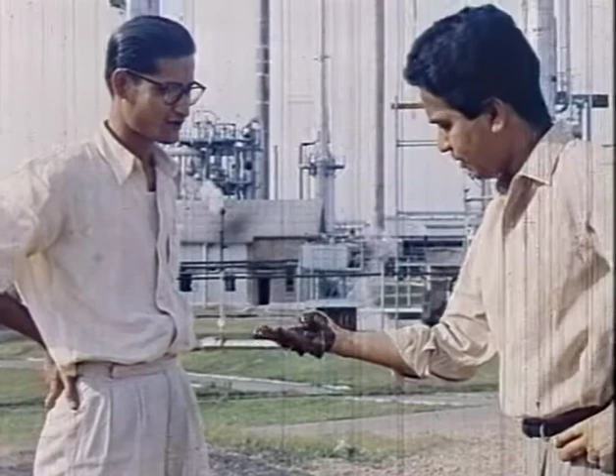This is oil. Thick, sticky crude oil. Black, dirty, and unrefined. It's got a long way to go before it becomes fuel and lubricants, candle wax and chemicals. It has, in fact, 700 miles to go, from the wells in Upper Assam to refineries in North India. Only a pipeline can make economic sense of such a journey.

So the sticky mess must somehow be persuaded to flow freely down 700 miles of pipe through little peasant holdings, which are the livelihood of small families, and great commercial tea gardens that are an important part of the economy. The wells and the refineries are both within the huge subcontinental state of India. And whilst agriculture is important, oil fuel supplies that do not have to be imported are precious beyond price in a land that's straining every fibre to become a self-supporting, modern industrial state.

The usual way of starting a big engineering project is to advertise the job in the press and let people who understand the work tender for it. In this case, the paper was the London Times, a copy of which was delivered as usual at the offices of W.H. Allen, Sons and Company of Bedford in England, who understand diesel and electric power very thoroughly indeed.

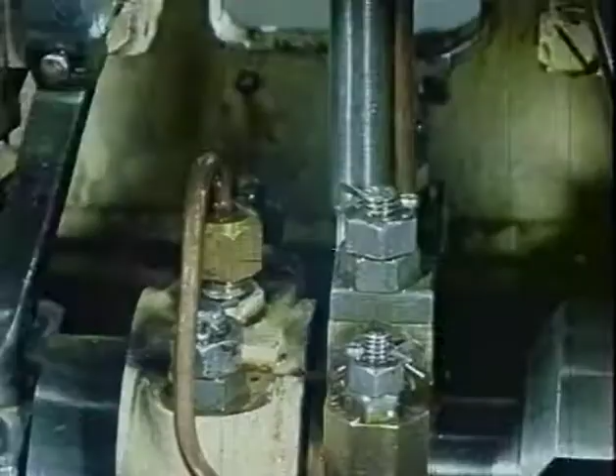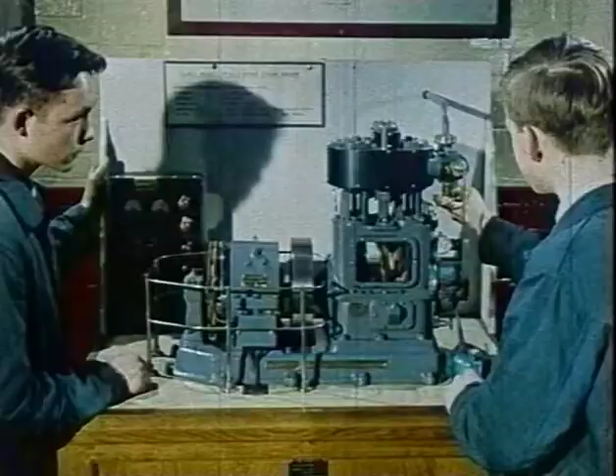This scale-working model of an engine was made by the apprentices at W.H. Allen's in their own training school. For any firm which intends to keep abreast of the fierce technical competition in modern industry cannot rely on chance for its supply of trained and expert personnel.

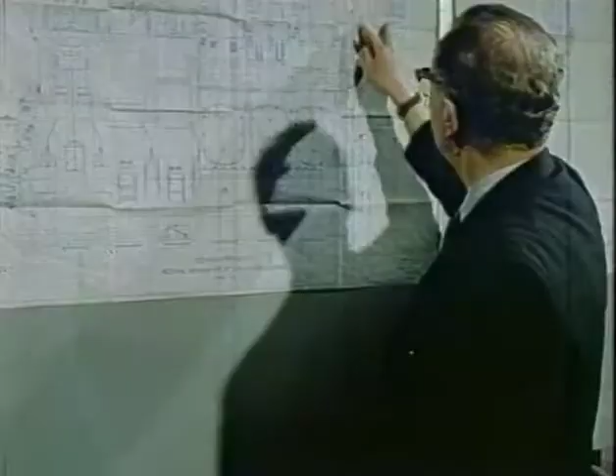And these boys may become the heads of departments who, not so many years ahead, may be making the same sort of decisions for the firm that are now being discussed by the chief designer and the manager of the diesel department. Once the specifications have arrived, the various design teams have to assess the difficulties, decide whether tried and conventional equipment will do the job, or whether special modifications or even entirely new designs may be called for.

In the case of the diesel engines to power the pumps and electric generators along the North India pipeline, the biggest problem was fuel, for only the crude in the pipeline or natural gas from the wells was readily available, and the specification called for an engine which could use either at the turn of a switch. This was nothing very new in engineering, but the crude from the Naharkatiya wells was a problem, as its high wax content makes it physically intractable and its low flash point requires respectful handling.

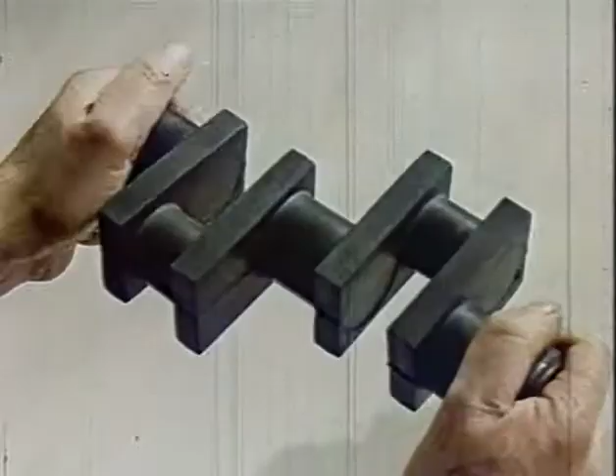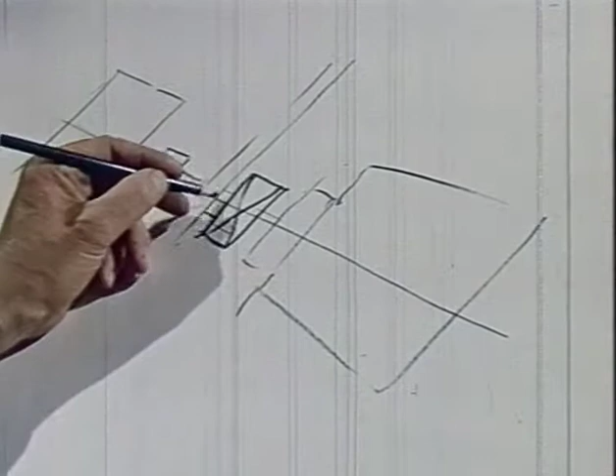Probably at no point in design more than now during the pre-tender work does that indispensable but unassessable quality of specialist experience play a greater part, because it's at this stage the fundamental assumptions must be made and decisions taken which will have to be turned into successful engineering and viable economics when the contract is placed. That's why every tender has the full attention of the best brains from the word go, and why there's no room at all for bluff, which would be called without remorse by the very forces of nature which it is the engineer's job to harness.

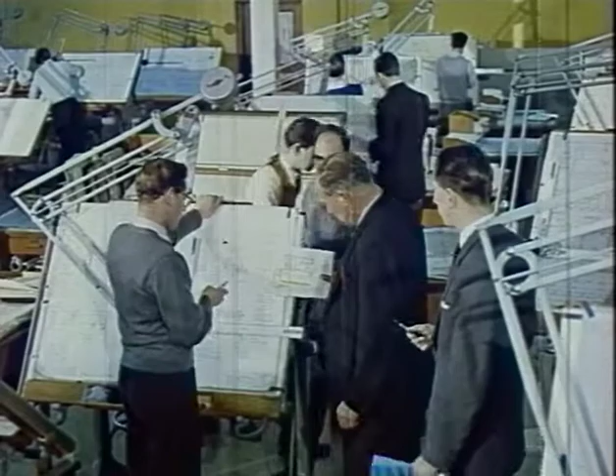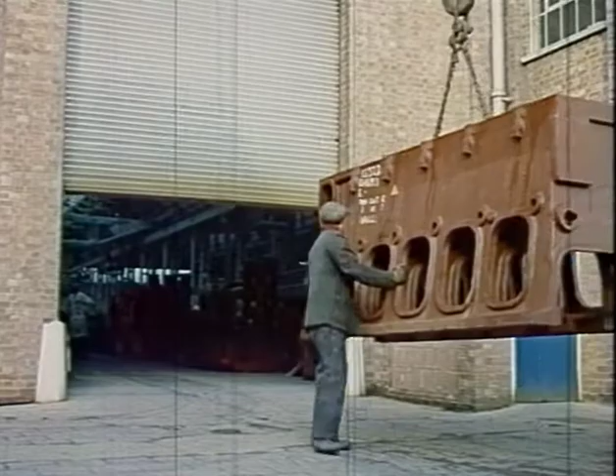The same quality of concentration on the work of tendering is applied to every inquiry, despite the fact that only a proportion result in orders. In this case, the particular solution of the engineering problems involved enabled an order to be obtained in the face of world competition. The arrival of heavy hardware from subcontractors is the visible evidence of the beginning of production, adding, as it were, a new ground bass to the everyday racket of the machine shops.

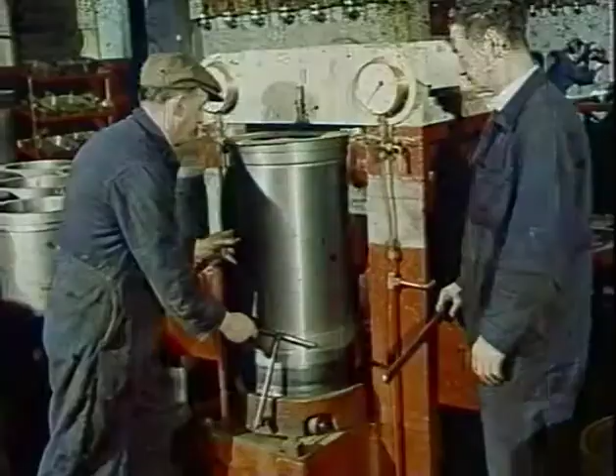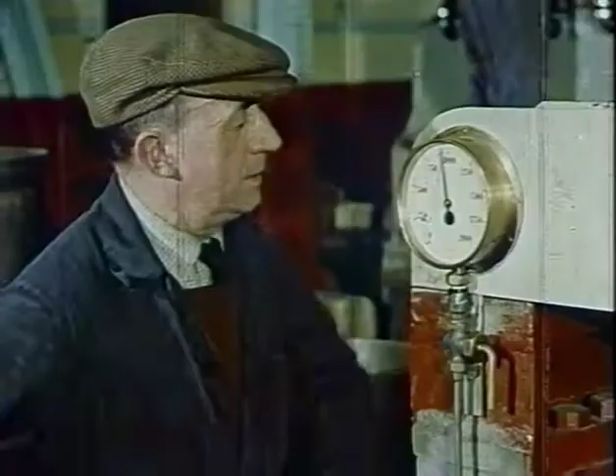From an early stage of manufacture, testing is constantly carried out. Here, a cylinder liner is being tested well in excess of its normal working pressure. And here a technician is satisfying himself as to the parallelism and diameter of a crankshaft.

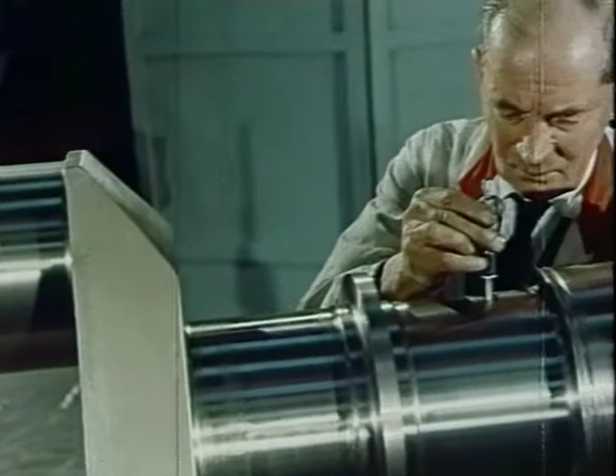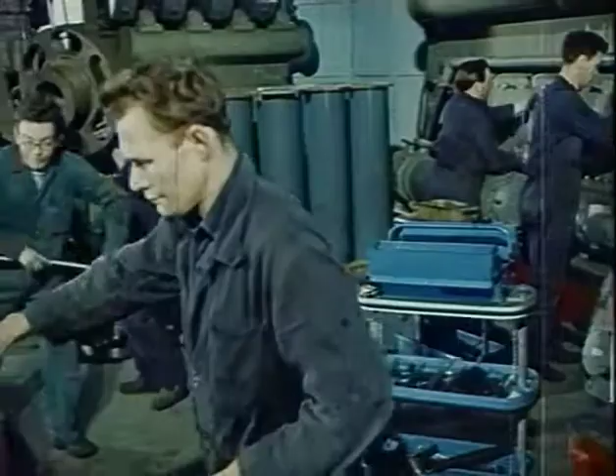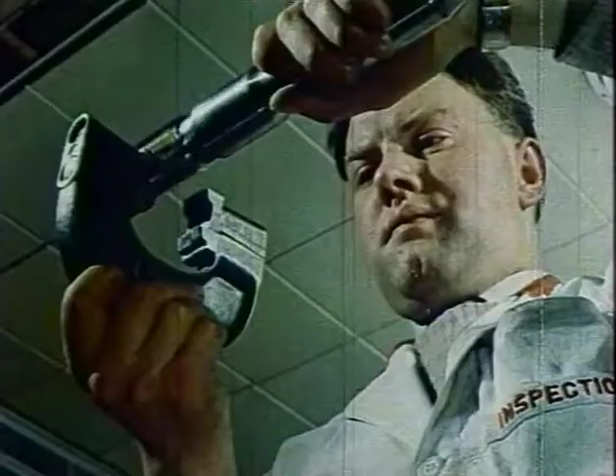Inspection and checking generally fall into two classes: control of manufacturing quality and accuracy, and the inspection of parts and indeed whole machines after test running under actual working conditions. To do this, the whole unit must be assembled and run, and before proceeding to this, it would be as well to take a look at the system of supplying fuel to one of the engines, remembering that this fuel is thick, crude oil.

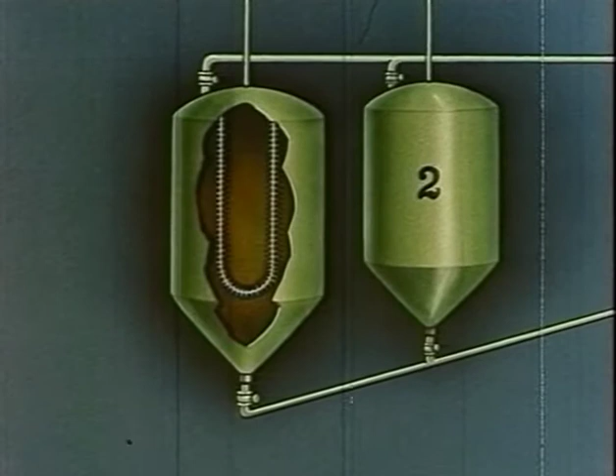First of all, we have two conical bottom tanks, each holding 1 day's supply of oil and fitted with tubular hot water heaters to improve the viscosity of the oil by raising its temperature to about 100 degrees Fahrenheit. In order further to purify the now warm and therefore more tractable but still very dirty fuel, the sludge is allowed to collect in the conical bottom and drained away.

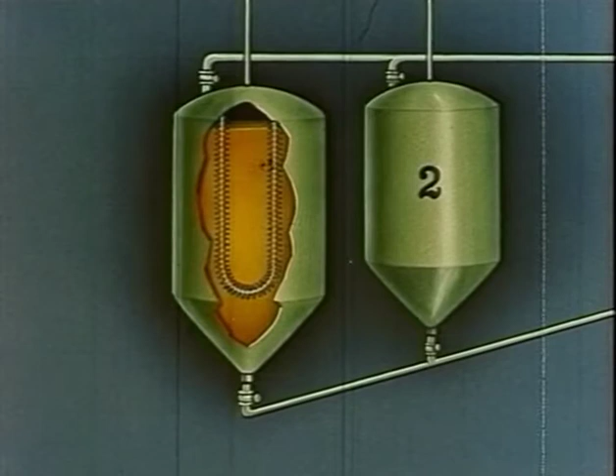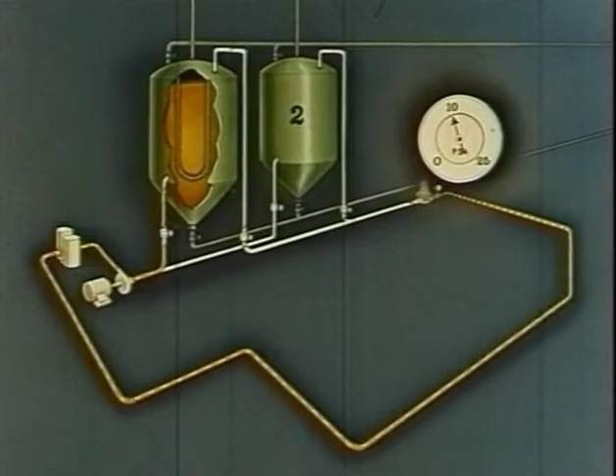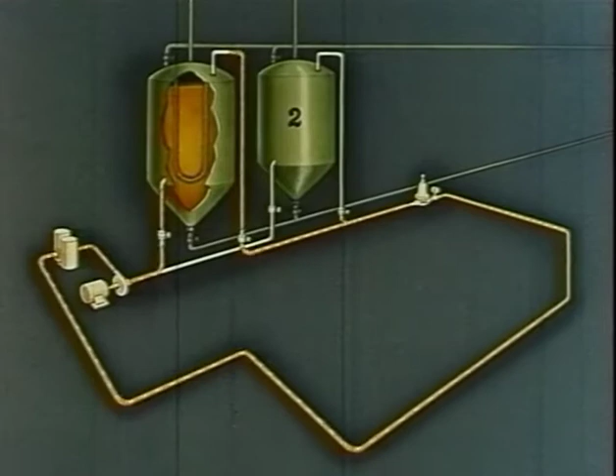The settled fuel is drawn from the tank in use by a circulating pump in a ring main system round each pumping station. It's passed through the main filter, then circulated in the ring main. Pressure in the system is controlled by a regulating valve at a normal working level of 20 pounds per square inch. The cycle is continuous, in that surplus oil is returned to the tank, then recirculated in the ring main, which is insulated to reduce heat losses.

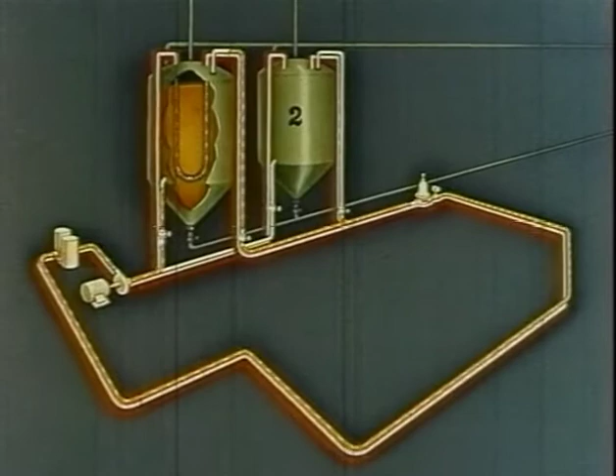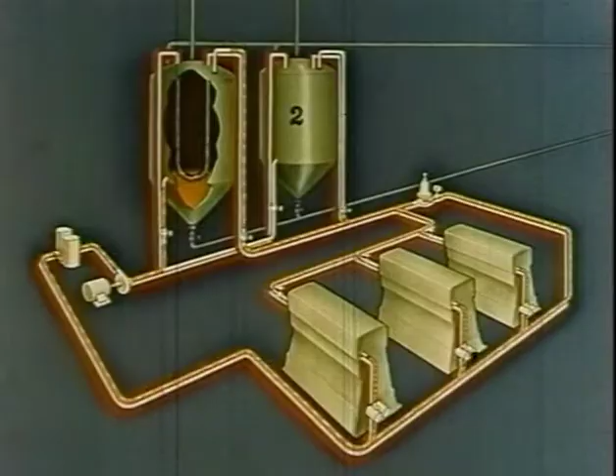When the engines are running, oil is constantly being drawn from the ring main system by the fuel injection pump at a rate less than that at which the oil is circulating, thus ensuring that a reasonable flow is always maintained in the system. That was a simplified picture of the fuel ring main. But in fact, it looks rather less neat and tidy when seen, as it is here, applied to a typical works research unit.

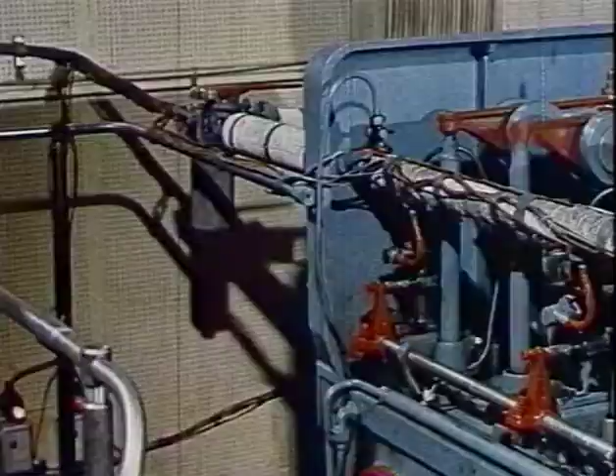This engine is first run on ordinary diesel fuel, and its performance is recorded. The pipework running along the top of the engine is in fact the ring main, which will shortly be carrying not clean diesel fuel, but this specially imported sample of crude oil from the wells at Nahorkatiya.

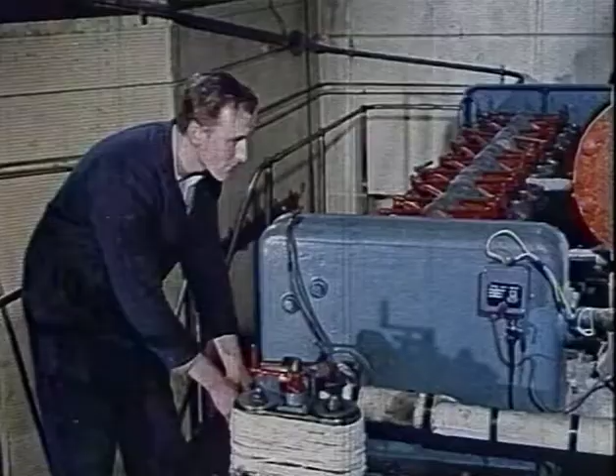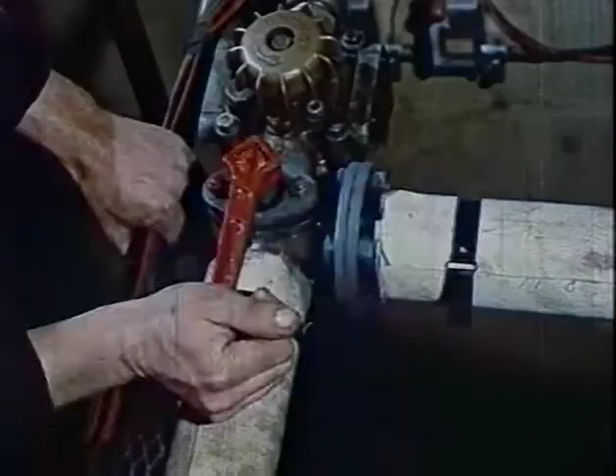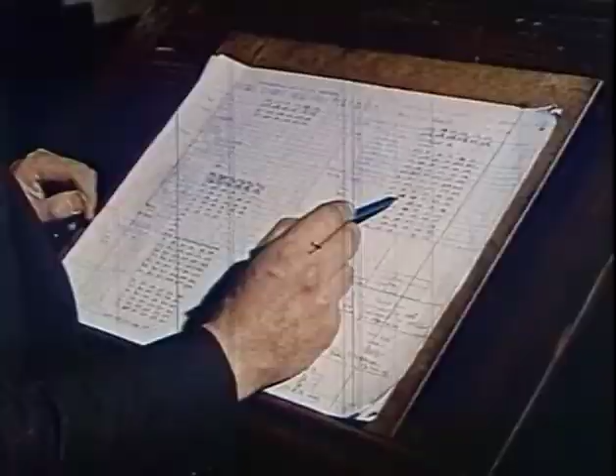For the test with crude oil fueling, the engine is started on diesel oil. This time, no prolonged test is made with the conventional fuel, and after a minute or so, a lever is moved, and the ring main starts to feed Nahorkatiya crude to the engine. Now the engine will run under load for 500 hours, and frequent readings will be taken at the engine and at the generator which it's driving until the great mass of data required has been accumulated.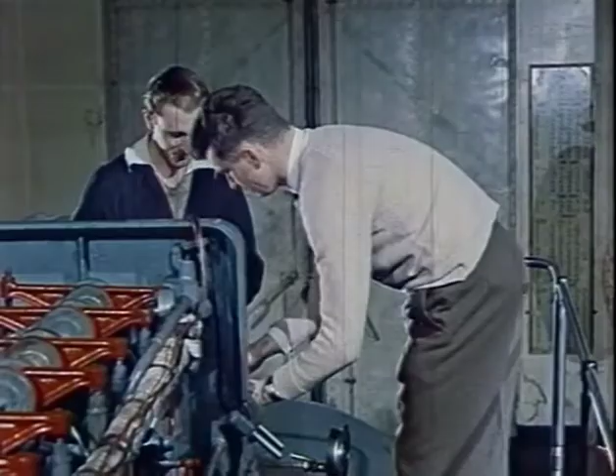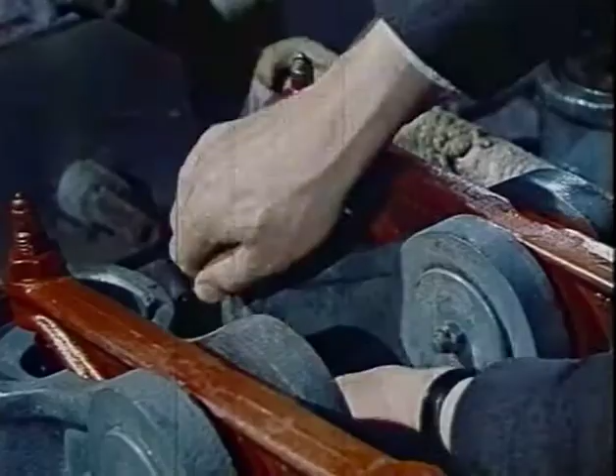The first performance figures are important to all concerned. It's also important to know just what is going to be left in those ring main filters after 500 hours of running a really big diesel like this on what is, after all, a purely fortuitous mixture of highly volatile petroleum products, something uncommonly like candle grease, and a lavish dash of good old Mother Earth, sand and all.

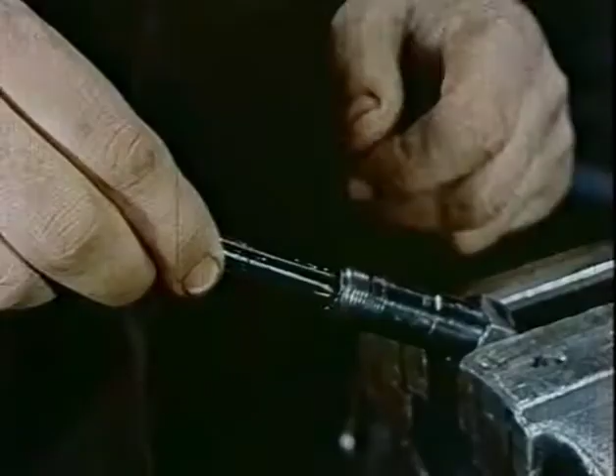This is where the filters, which later on will have the highly important job of keeping the worst of the foreign bodies out of the engine, do an extra job of showing just exactly what they can trap, and therefore, by implication, what is likely to be offered to the engine as fuel. Dirty enough stuff it looks to the naked eye. But under the microscope, it's hard to believe that any engine would accept it as fuel.

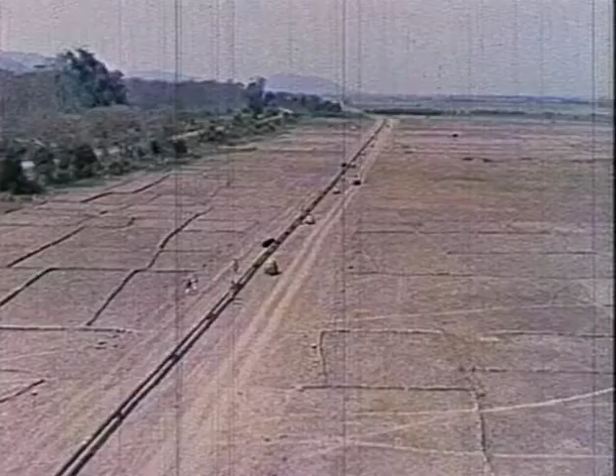That's the sort of fuel the engines will have to use to move 700 miles of waxy, sulky crude. But what sort of engines will they be? Well, first of all, the fuel situation along the pipeline dictates the basic engine design. At Nahorkatiya, the enormous supply of natural gas, some of which hitherto had been flared off, was to be used as fuel, in conjunction with a small percentage of the crude oil from the same important local wells.

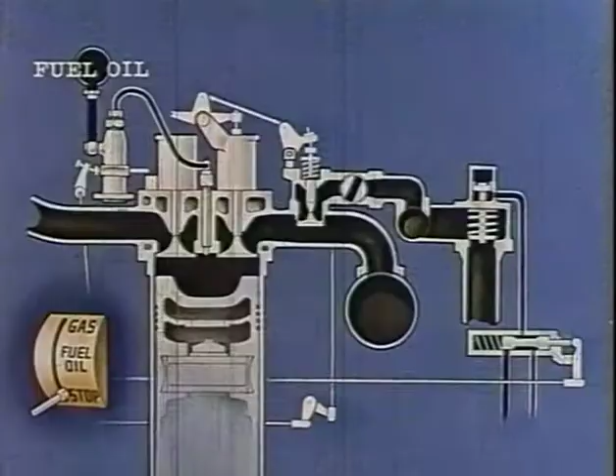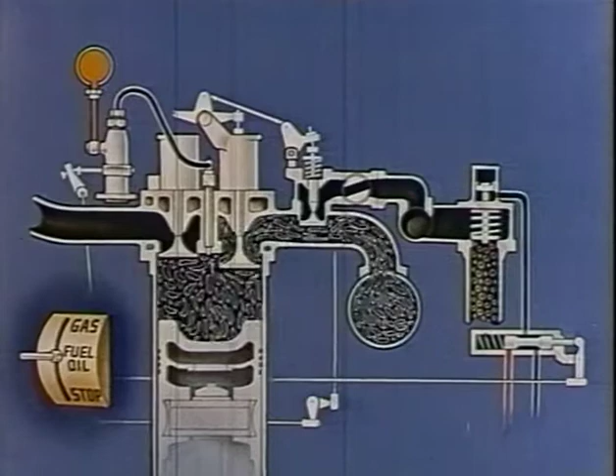Where gas was available, the answer was a dual-fuel engine, one which can run on liquid or gaseous fuel, the gas being ignited by a small amount of liquid fuel. The engine is started, and to begin with, runs on liquid from the pipeline, like every four-stroke diesel. But once it's running on oil, it can be switched over by manual control to run on gas. This changeover does not interrupt the output of power.

When running on gas, the consumption of oil is reduced by over 90%, and in the event of a failure in the gas supply, the engine reverts automatically to oil, at the same time closing the main gas valve, which eliminates any possible danger when gas pressure is restored.

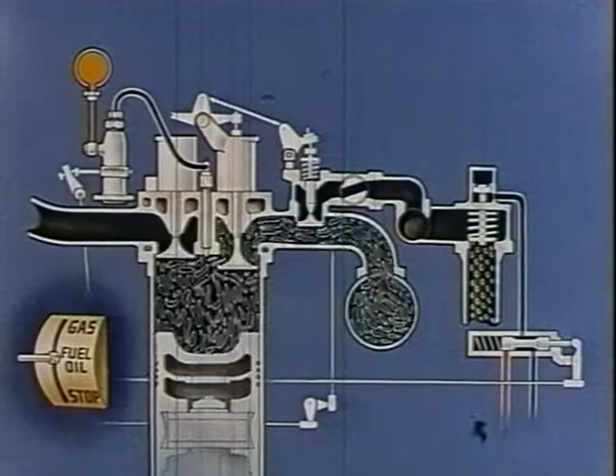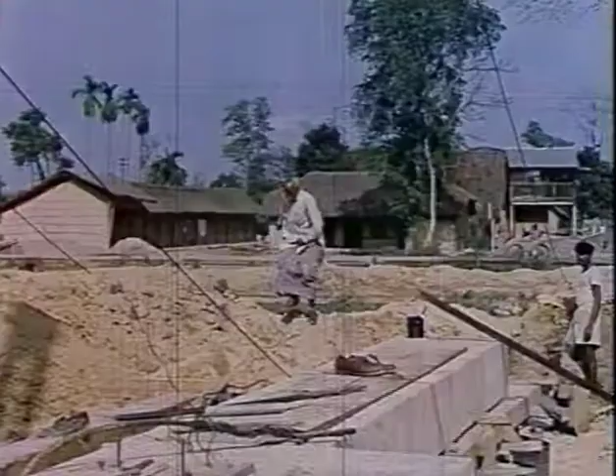By now, the contractors out in India are beginning to show results in the work of erecting the pumping stations along the pipeline. For the first time, it's possible to get a more than purely theoretical idea of where everything is going to be put and how it's all going to fit together. For the first time, too, even the most determinedly professional engineer cannot help but catch a whiff of the heady air of creation that is about.

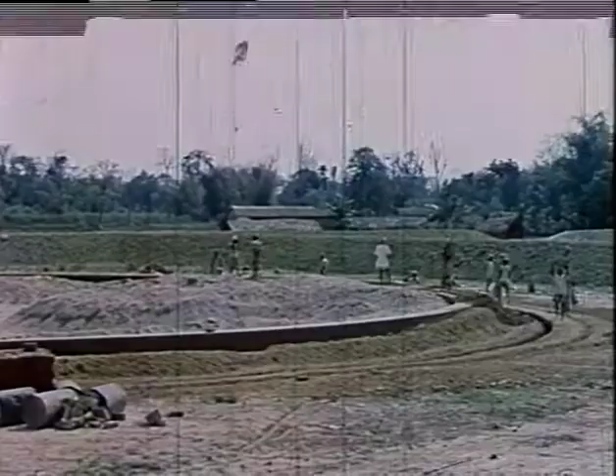For this is going to be more than a big subcontract to a huge undertaking. It's taking part in the explosive emergence of what is a continent in all but name, as a partner in the wonders and responsibilities of the second half of the 20th century. For the pipeline and its pumping stations will be run by Indian engineers, graduates possibly of this very institution in the state from which the crude oil comes.

India, like every other state at a critical stage in industrialization, is training her technical students wherever the best in knowledge and technique is available, including the W.H. Allen Works at Bedford, where this group is studying work in the electrical shops where the self-regulating alternators for the North India Pipeline's power supply are being made.

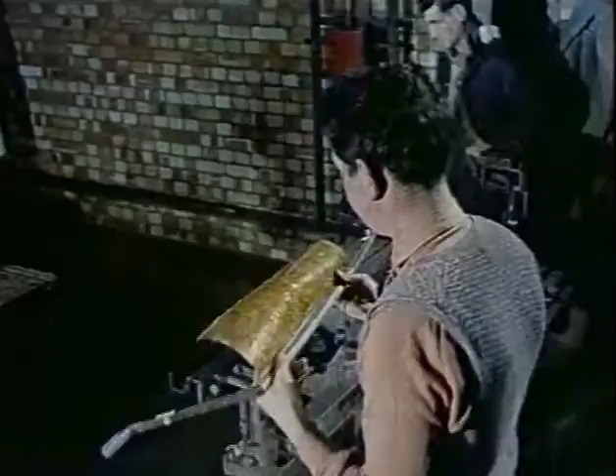No young engineer can get far without a good theoretical training, but nevertheless, first-hand experience of the problems and the skills of the actual builders of modern machinery can do something beyond the power of any textbook.

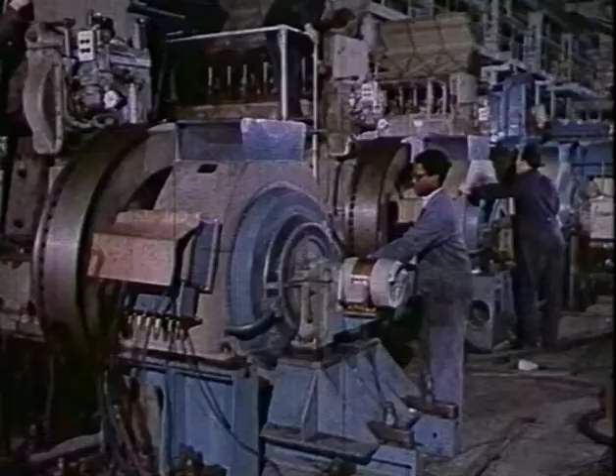The complex organization of manufacture and testing moves forward all the time, each item being fitted to its appropriate neighbor in the scheme and the scale of operations growing all the time until it culminates in the products of the electrical and the diesel departments being coupled together to run the most important test of all, a pair of newly built engines driving two of the actual alternators under load.

This is a test to prove the performance of complete units, but to the layman, it has more than a little of the panache of the concert platform.

This full-scale test is in fact the last of any kind that the equipment will undergo before it is started up on its permanent site in India. For this reason, if for no other, it is attended not only by the members of W.H. Allen's team of specialists, but by the engineering representative of the customer.

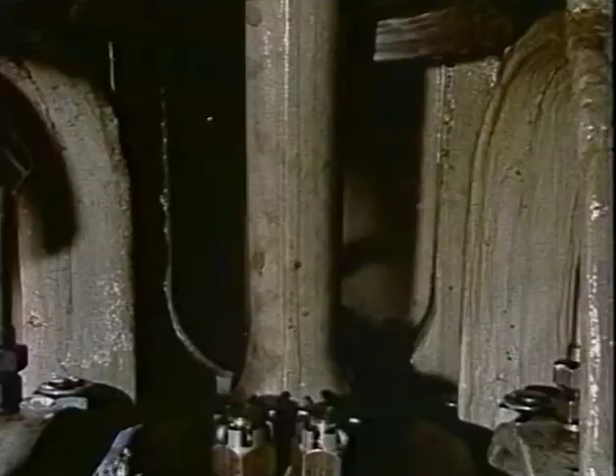No sooner is the engine shut down than a complete dismantling begins. Everything is stripped down to its component parts and a minute examination is made to discover whether any part has in any way deviated from its expected performance, calculated not only on design theory, but from the earlier practical tests.

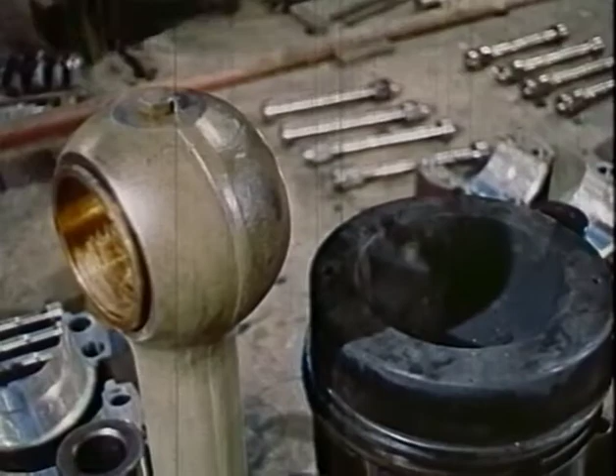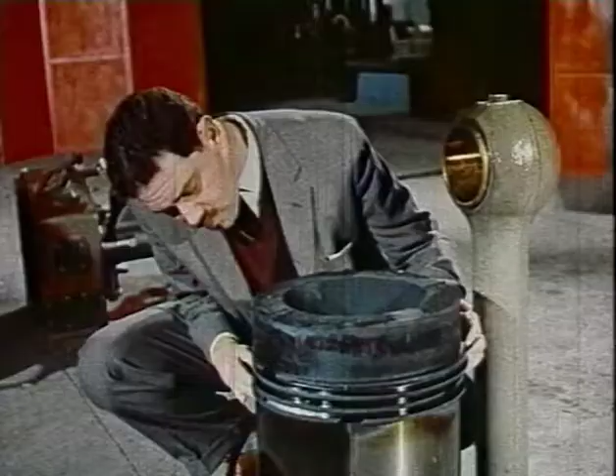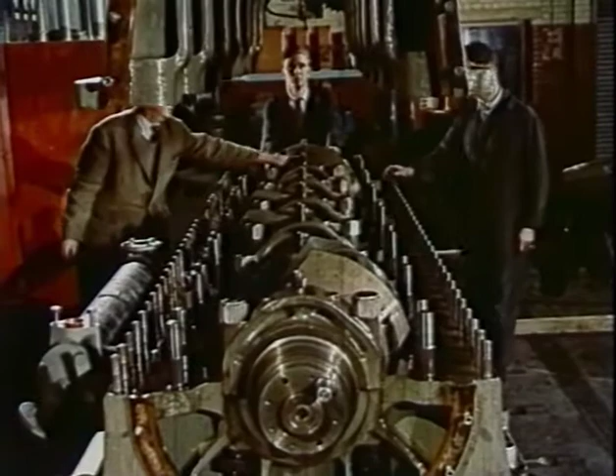Here again, the customer's engineer is very much in evidence and becomes a part of the manufacturer's team in their common search for any sign of abnormal wear. For this is common ground, and maker and customer share a common aim, the best that engineering skill can produce.

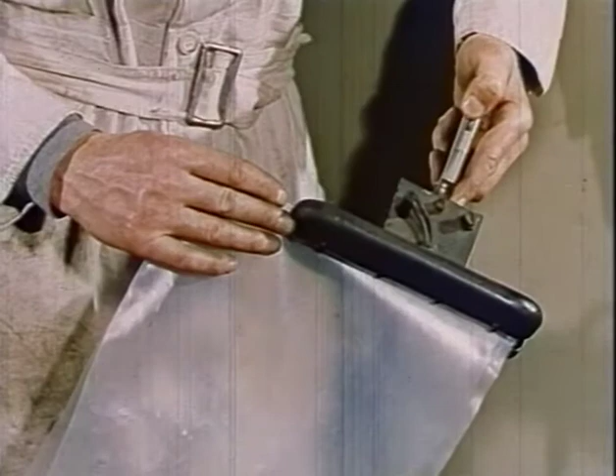As each section is inspected and passed for export, it has to be prepared to withstand the various hazards of the journey. Of these, heat and damp are not the least, and it's necessary to enclose many of the more delicate parts in airtight polythene bags, carefully sealed, and from which the air is then mechanically exhausted.

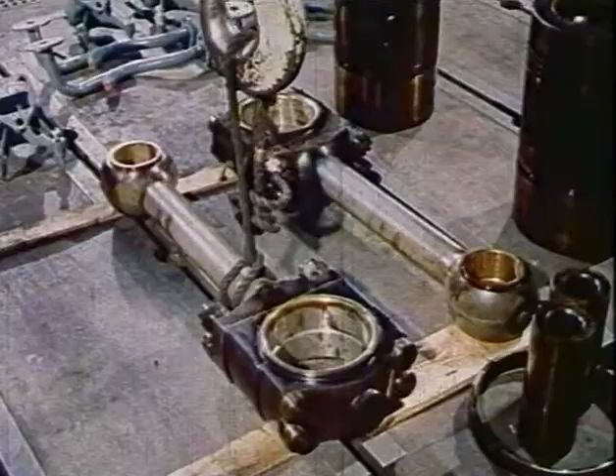This method provides very effective protection from extremes of climate. And of course, the relatively delicate polythene is further protected by waterproofed heavy crates from the more violent hazards of long-distance travel.

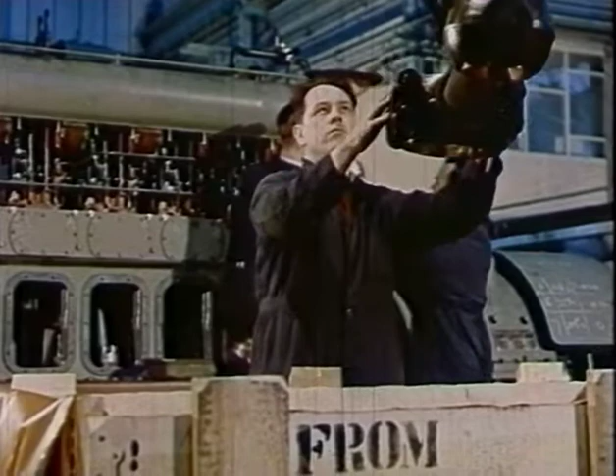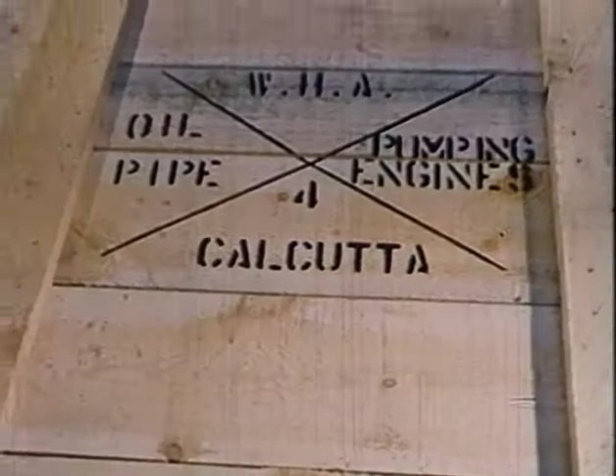Once again, minute care characterizes even the apparently less enthralling processes of packing, and rightly so. For these crates contain the work of many men and many months, and they have a long, hard journey ahead of them.

Eventually, the whole plant, mechanical and electrical, stands crated and anonymous at the assembly point in India. This is perhaps the moment to reflect on how all this machinery is going to work and who is going to work it. The most important part in the whole scheme of control lies in the second part of the question, for this will be the most advanced pipeline in the world, and the pumping stations will be remotely controlled.

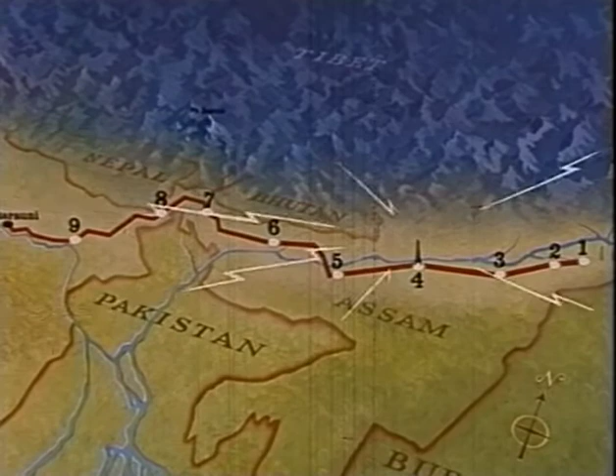This represents an enormous advance over earlier control systems, and months of cooperation between the engine designers at W.H. Allen and the communication engineers were needed. The flow in the buried pipeline will be controlled by a dispatcher who can operate any of the stations by means of an extremely sophisticated control system incorporating a VHF radio network. Most of the control is directly electrical, and for the first time in pipeline history avoids cumbersome pneumatic devices.

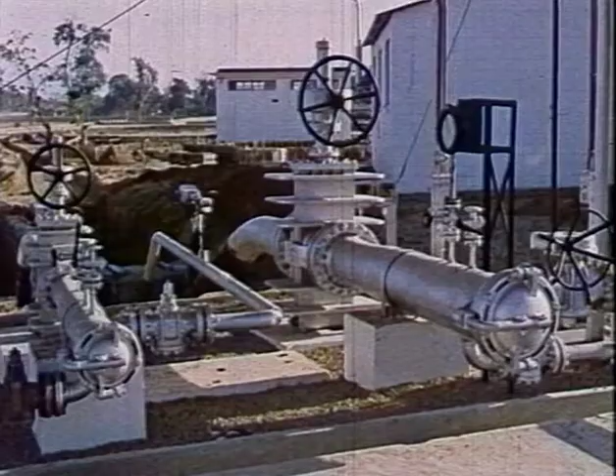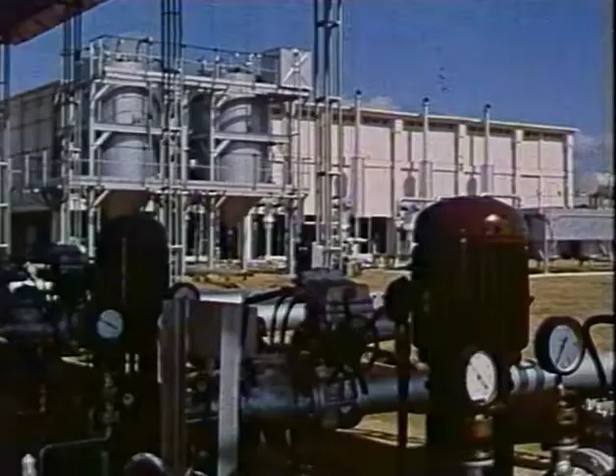There she is, a little smarter in her new paint than the last time we saw her, coupled up to the huge ram pump and ready to go. Once the ring main section looked obscure and grubby in the test bay. Now everything looks almost unnaturally clean and bright in the hot sunshine. You would hardly recognize our old friends, the conical bottom fuel tanks, in these gleaming monsters in the background, but that's what they are.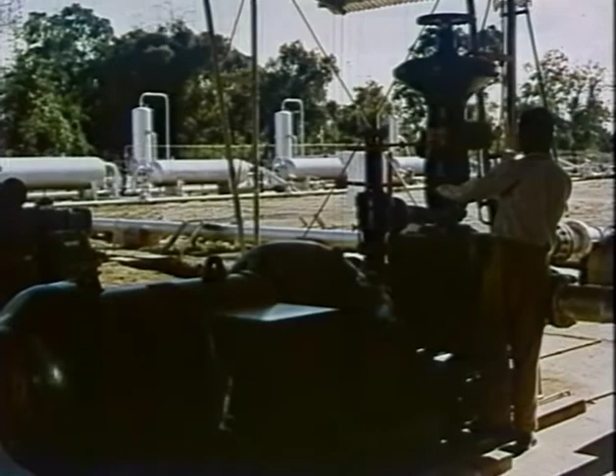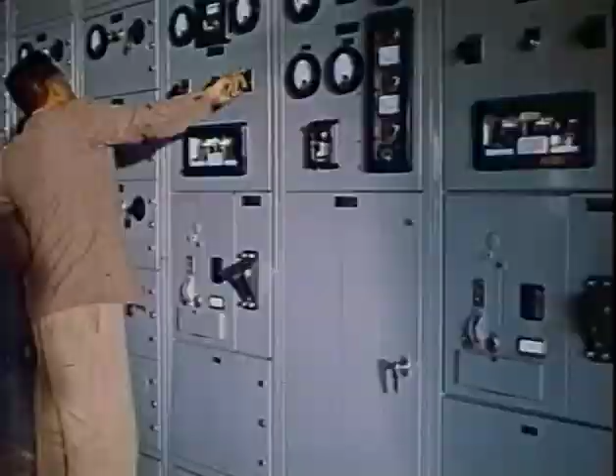Nothing dramatic happens when the power is switched on. Nobody really does anything at all, except one man many miles away. And all he does is press a button. And all along the green foothills of the Himalayas, from Assam to Barauni and far Bihar, 700 miles of oil starts slowly to move westward under the power of 51 diesel engines made in Bedford in England by people who know their job.